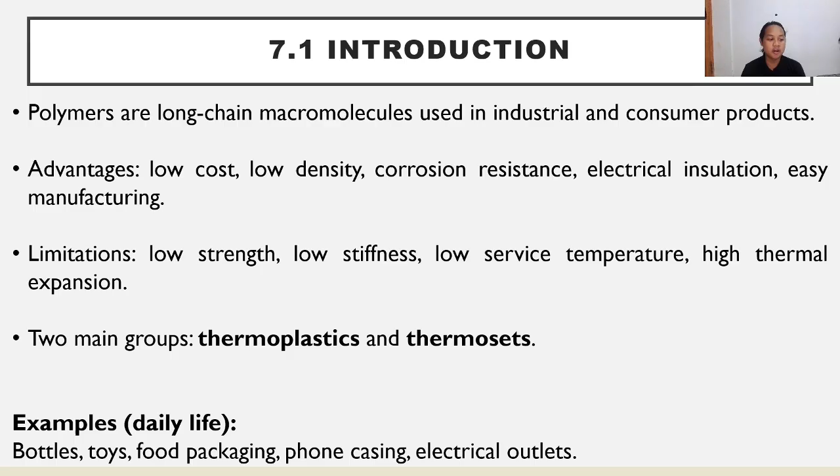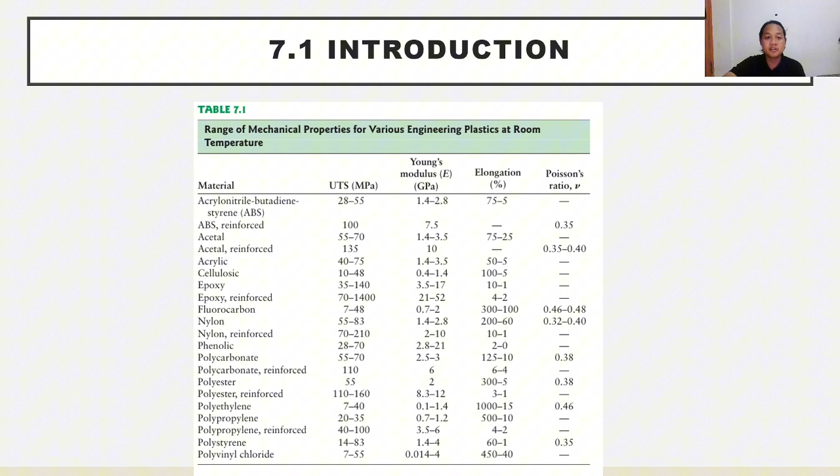These are the range of mechanical properties for various engineering plastics at room temperature, as you can see in table 7.1.

Next, the structure of polymers. The properties of polymers depend largely on the structure of individual polymer molecules, molecule shape and size, and the arrangement of molecules to form a polymer structure.

Polymer molecules are characterized by their very large size, a feature that distinguishes them from most other organic chemical compositions.

First, we have the polymer basics. These polymers consist of repeating units called MERS, made through polymerization, like linking monomers into long chains.

Next, we have the polymerization types. There is condensation polymerization, which produces polymers plus byproducts. And we have addition polymerization, with no byproduct, where MERs add into the chain.

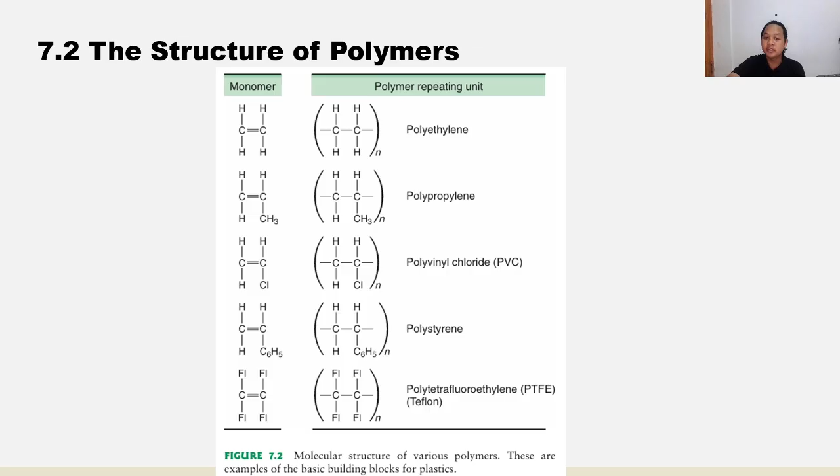Next is polymerization. Polymerization processes are complex. They will be described only briefly here, although there are several variations.

Two polymerization processes are important, like condensation and addition polymerization. The polymerization monomers can be linked into the polymers in repeating units to make longer and larger molecules by a chemical process called a polymerization reaction.

In condensation polymerization, as you can see in figure 7.3 in the next slide, polymers are produced by the formation of bonds between two types of reacting mers. A characteristic of this reaction is that reaction byproducts are condensed out.

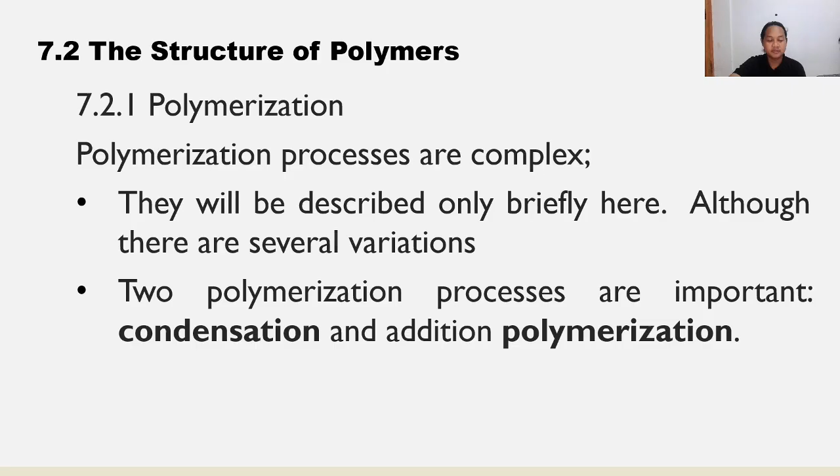As you can see in figure 7.3, we have the example of polymerization. In point A, we have condensation polymerization of nylon 6,6, and point B, we have the addition polymerization of polyethylene molecules from ethylene mers.

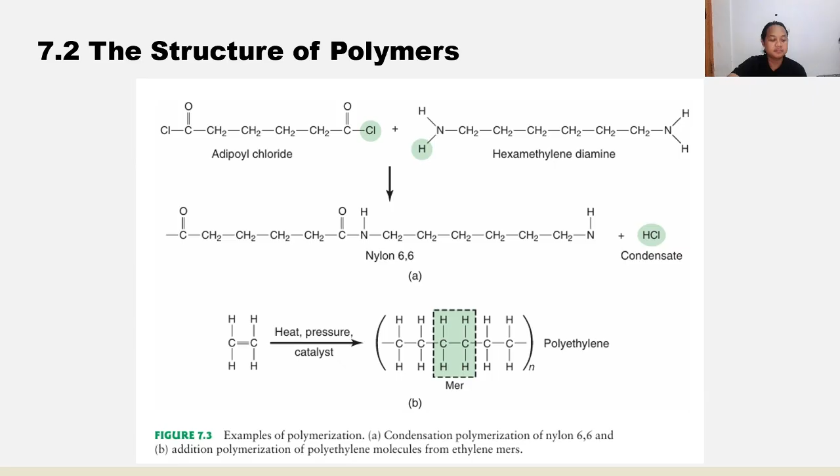In point A, we have the linear structure. Thermoplastics such as acrylics, nylons, polyethylene and polyvinyl chloride have linear structure. The chain-like polymers shown in figure 7.2 are called linear polymers because of their sequential structure.

In point B, we have the branch structure, such as in polyethylene. The properties of a branch polymer depend not only on the type of monomers, but also on their arrangement in the molecular structure.

In point C, we have cross-link structure. Many rubbers or elastomers have this structure, and the vulcanization of rubber produces this structure. Cross-link polymers are generally three-dimensional in structure, with adjacent chains linked by covalent bonds.

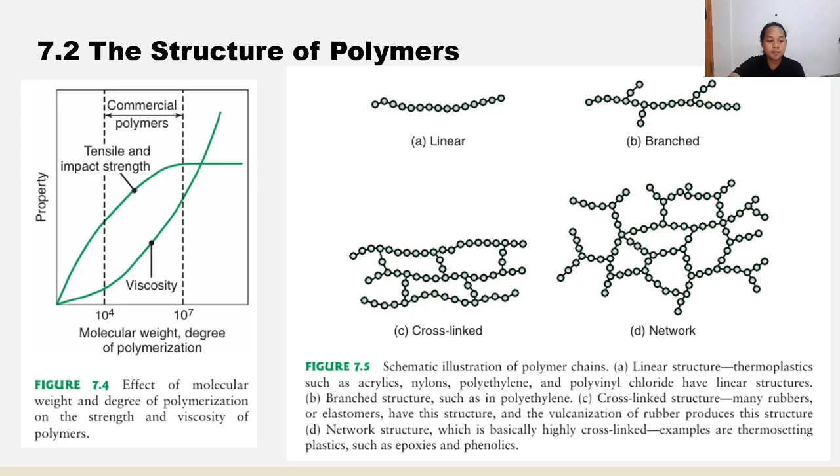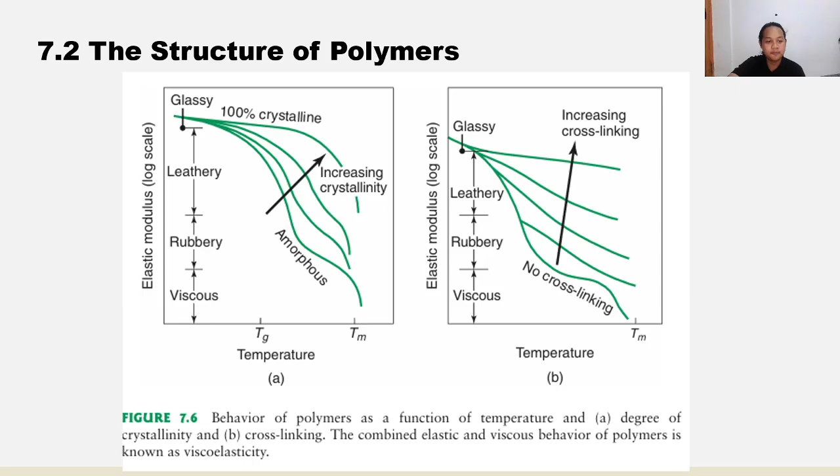These are the figures like the elastic modulus and temperature for the polymers. In figure 7.6, there is the behavior of polymers as a function of temperature and degree of crystallinity and cross-linking. The combined elastic and viscous behavior of polymers is known as viscoelasticity.

Next, you have crystallinity. The crystalline regions in polymers are called crystallites. These crystals are formed when the long molecules arrange themselves in an orderly manner, similar to the folding of a fire hose in a cabinet or of facial tissues in a box.

The crystalline regions increase strength, hardness, and melting point. Next are amorphous regions, which are more flexible and transparent. Although amorphous polymers do not have a specific melting point, they undergo a distinct change in their mechanical behavior across a narrow range of temperatures.

Next is glass transition temperature, or TG. The polymer becomes soft or rubbery above TG.

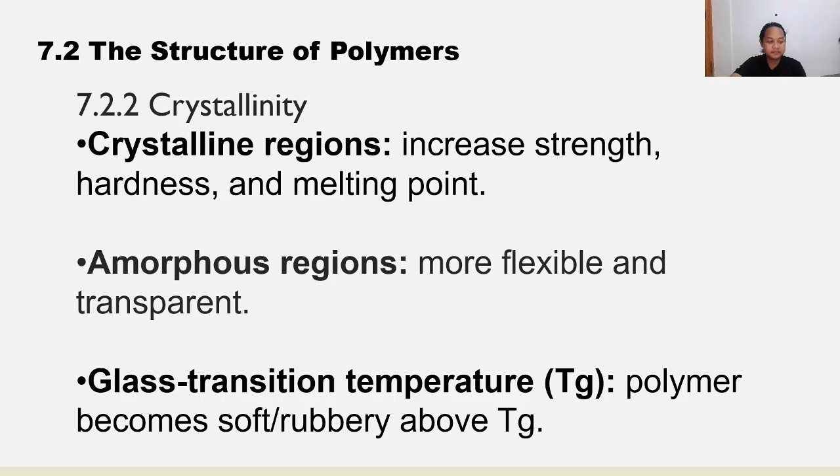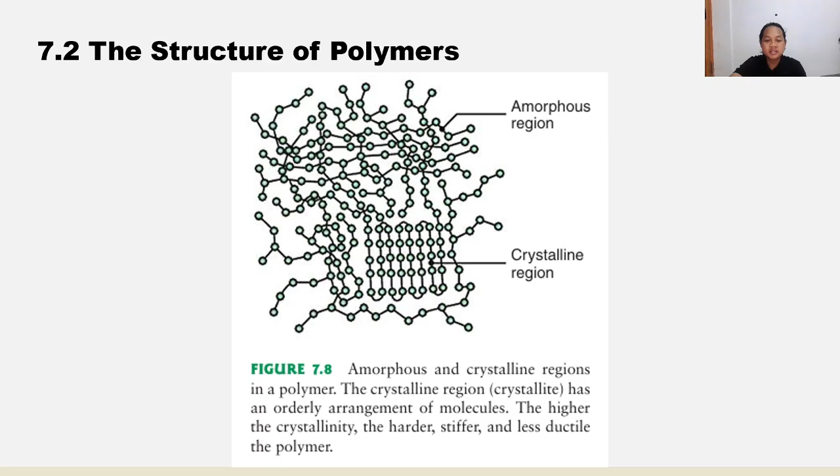These are the pictures of amorphous and crystalline regions in a polymer. The crystalline region, or crystallite, has an orderly arrangement of molecules. The higher the crystallinity, the harder, stiffer, and less ductile the polymer.

Next, we have the glass transition temperature. Although amorphous polymers do not have a specific melting point, they undergo a distinct change in their mechanical behavior. At low temperatures they are hard, rigid, brittle, and glassy, but at high temperatures they are rubbery or leathery.

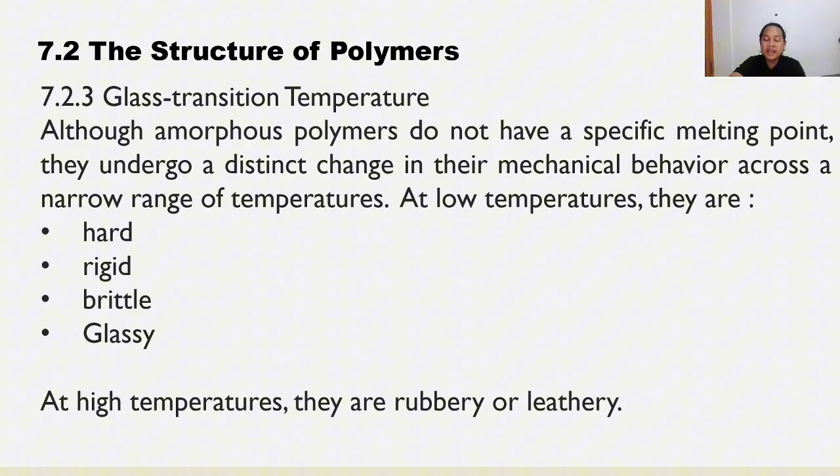These are the figures of specific volume of polymers as a function of temperature. Amorphous polymers such as acrylic and polycarbonate have a glass transition temperature, TG, but do not have a specific melting point, TM. Partly crystalline polymers such as polyethylene and nylon contract sharply while passing through their melting temperatures during cooling.

As you can see in Table 7.2, there are the glass transition and melting temperatures of some polymers like nylon 6,6, polycarbonate, polyester, polyethylene, and others.

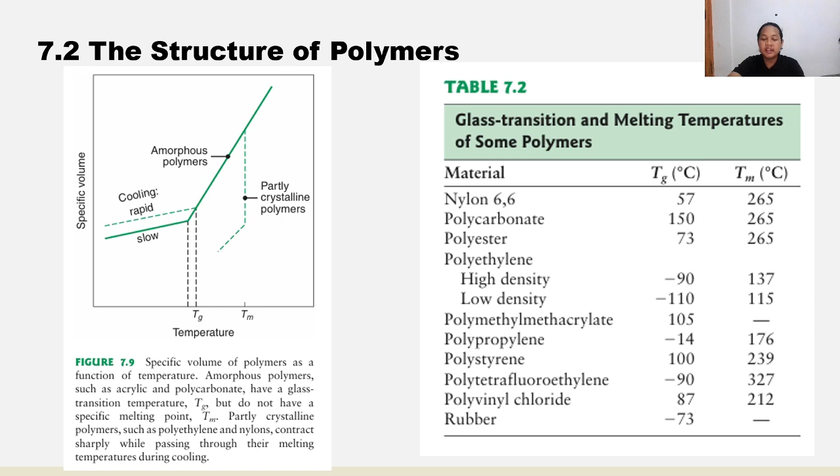Next, you have polymer blends. The advance in blending involves several components, creating polyblends that utilize the favorable properties of different polymers.

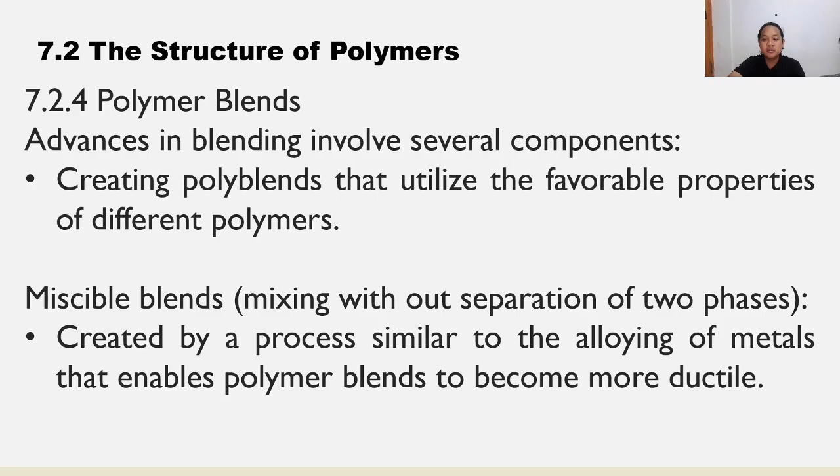Next, we have miscible blends, mixing without separation of two phases, created by a process similar to the alloying of metals, which enables polymer blends to become more ductile.

Next is thermoplastic. It was noted earlier that within each molecule, the bonds between adjacent long-chain molecules are much weaker than the covalent bonds between mers. It is the strength of the secondary bonds that determines the overall strength of the polymer.

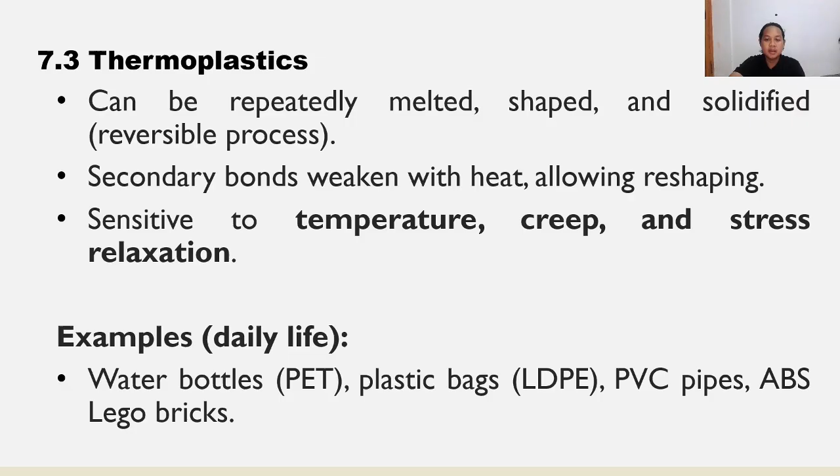Linear and branched polymers have weak secondary bonds. Thermoplastics can be repeatedly melted, shaped, and solidified, meaning the process is reversible. Secondary bonds weaken with heat, allowing reshaping, and making the material sensitive to temperature, creep, and stress relaxation. Examples are water bottles, plastic bags, PVC pipes, and ABS Lego bricks.

In Figure 7.10, we have the general terminology describing the behavior of three types of plastics. PTFE has Teflon as its trade name, and Figure 7.11 shows the effect of temperature on the stress-strain curve for cellulose acetate, a thermoplastic. Note the large drop in strength and the large increase in ductility with a relatively small increase in temperature.

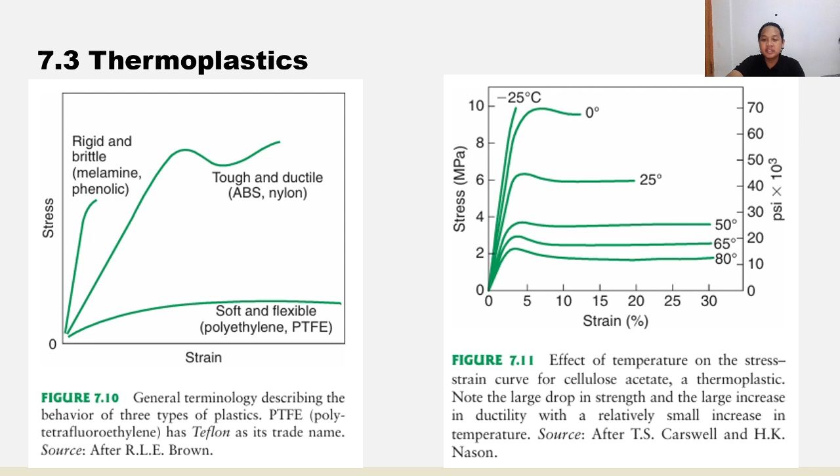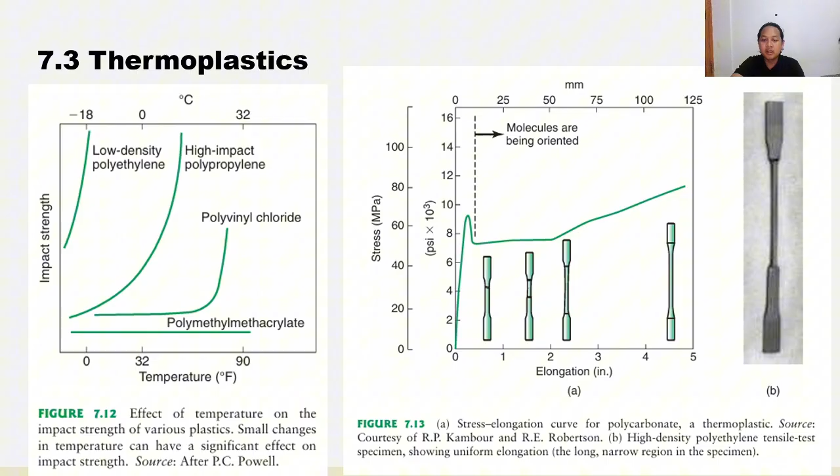In Figure 7.13, point A shows the stress-elongation curve for polycarbonate, a thermoplastic. Point B shows the high density polyethylene tensile test specimen, showing uniform elongation, the long and narrow region in the specimen.

Next, we have thermosetting plastics. When the long chain molecules in a polymer are cross-linked in a three-dimensional arrangement, the structure in effect becomes one giant molecule with strong covalent bonds.

These polymers are called thermosetting polymers, or thermosets, because the network is completed and the shape of the part is permanently set. This curing reaction, unlike that of thermoplastics, is irreversible.

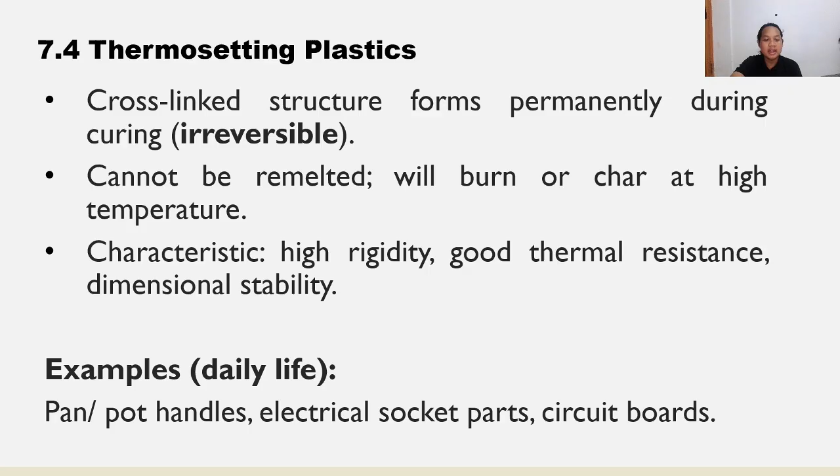As I said before, thermosetting plastics have a cross-linked structure that forms permanently during curing, meaning it's irreversible. They cannot be remelted, and will burn or char at high temperature. Characteristics include high rigidity, good thermal resistance, and dimensional stability. Examples in daily life of thermosetting plastics are pan or pot handles, electrical socket parts, and circuit boards.

Next is additives in plastics. In order to impart certain specific properties, polymers usually are compounded with additives.

These additives modify and improve certain characteristics of the polymer, such as stiffness, strength, color, weatherability, flammability, arc resistance for electrical applications, and ease of subsequent processing. The additives modify properties and performance of plastics.

There are common types: fillers to increase strength and reduce cost, plasticizers to improve flexibility, stabilizers to prevent degradation, colorants to add color, flame retardants to improve fire resistance, and lubricants to improve moldability.

Examples in daily life of additives in plastics are plasticizer in flexible PVC cables, and fillers in dashboard or panel components.

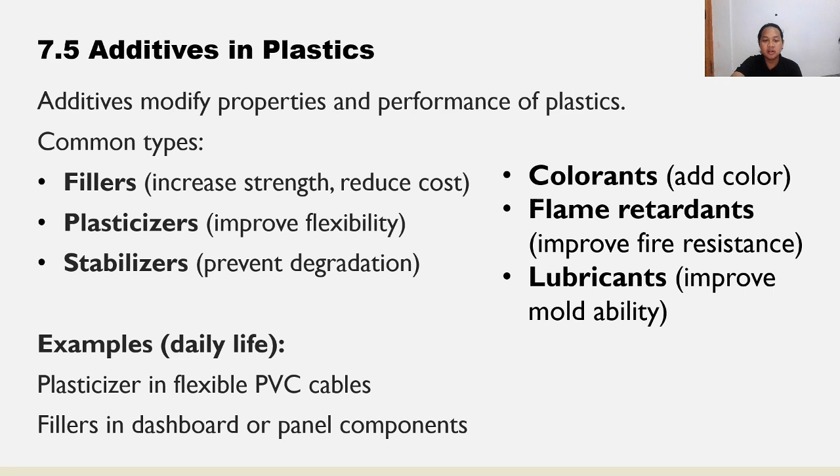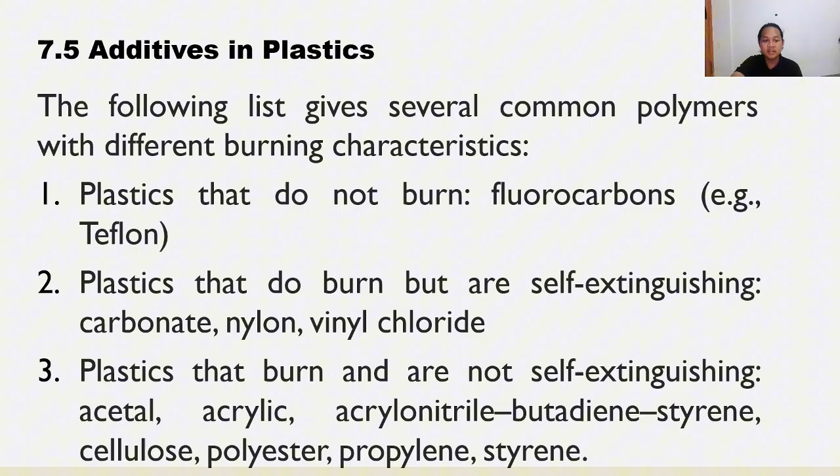The following list gives several common polymers with different burning characteristics. First, plastics that do not burn, or fluorocarbons. Second, plastics that do burn but are self-extinguishing, like carbonate, nylon, and vinyl chloride. Third, plastics that burn and are not self-extinguishing, like acetal, acrylic, acrylonitrile butadiene styrene, cellulose, polyester, propylene, and styrene.

Next, we have the general properties and applications of thermoplastics. The general characteristics and typical applications of major thermoplastics, particularly as they relate to the manufacturing and service life of plastic products and components, are outlined in this section.

General recommendations for various plastic applications are given in Table 7.3 and Table 7.4, which list some of the more common trade names of thermoplastics.

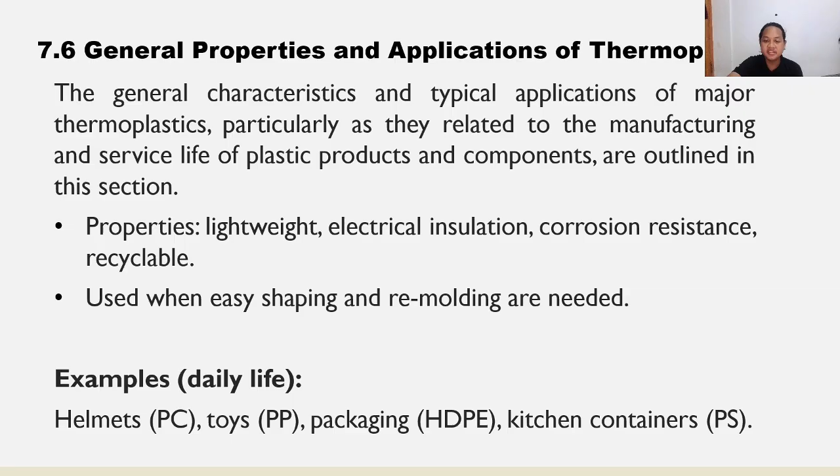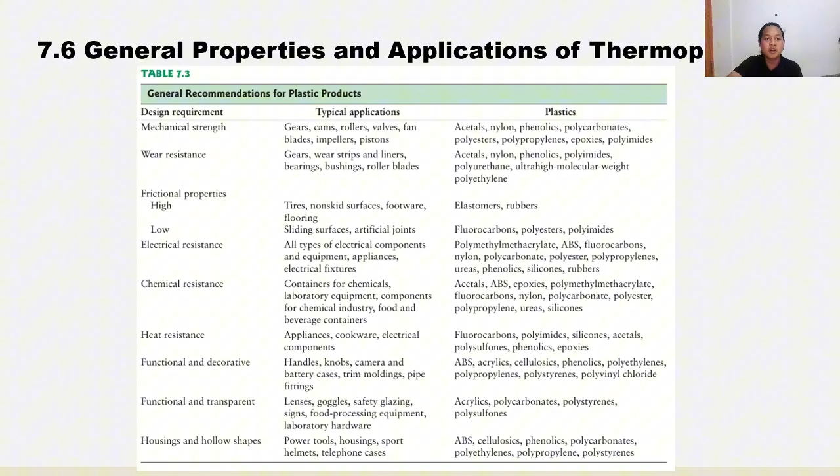These are the tables that have the general recommendations for plastic products, like the design requirement for mechanical strength, typical applications, and the plastics used.

In Table 7.4, there are trade names for thermoplastic polymers.

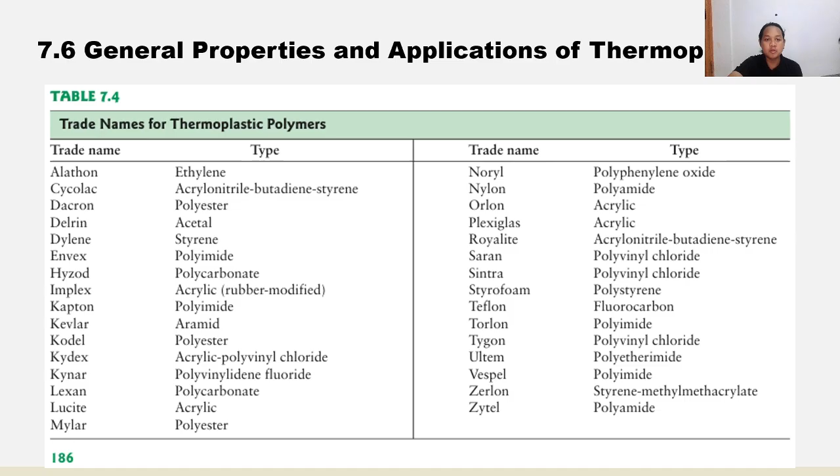Next, you have acetals, from acetic acid and alcohol, which have good strength, good stiffness, and good resistance to creep, abrasion, moisture, heat, and chemicals. Acrylics possess moderate strength, good optical properties, and weather resistance.

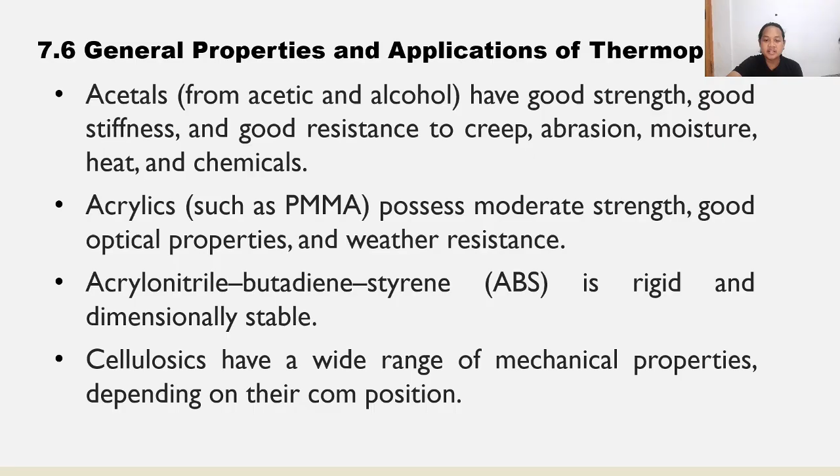Next is acrylonitrile butadiene styrene, which is rigid and dimensionally stable. Next is cellulosics, which have a wide range of mechanical properties depending on their composition.

Fluorocarbons possess good resistance to high temperature, chemicals, weather, and electricity. For example, a melting point of 327 degrees Celsius or 621 degrees Fahrenheit for Teflon. Polyamides, from the words poly, amine, and carboxyl acid, are available in two main types: nylons and aramids.

Nylons, a coined word, have good mechanical properties and abrasion resistance. Aramids, or aromatic polyamides, have very high tensile strength and stiffness.

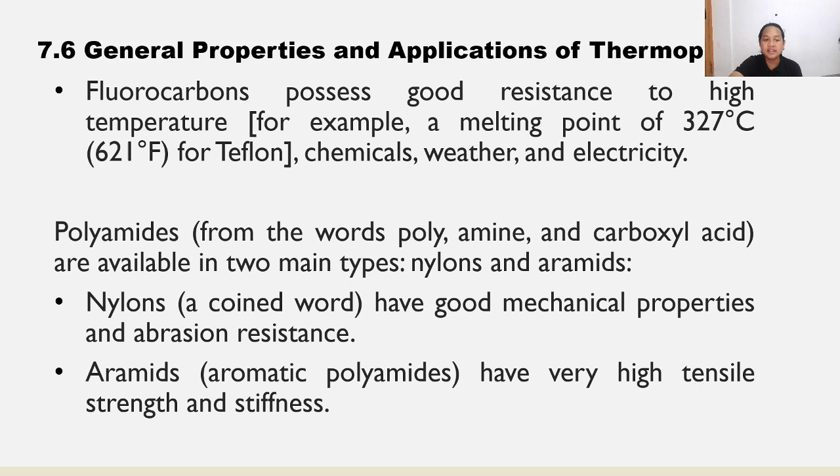Polycarbonates are versatile. Polyesters have good mechanical, electrical, and chemical properties, good abrasion resistance, and low friction. Polyethylenes possess good electrical and chemical properties, and their mechanical properties depend on composition and structure.

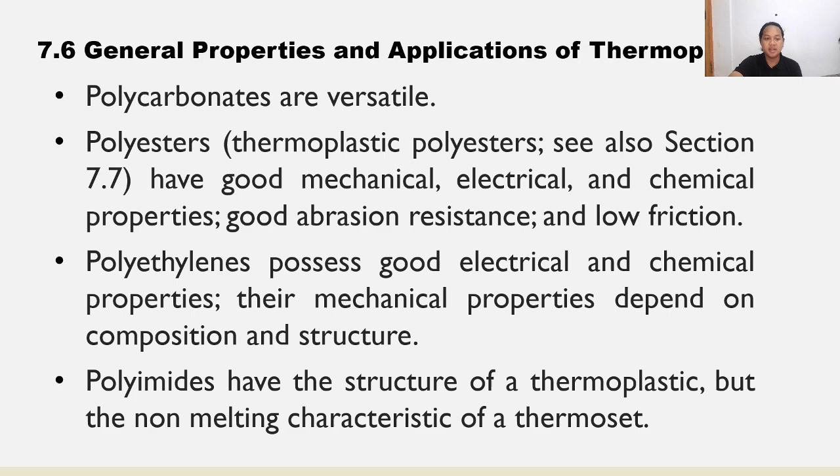Polyimides have the structure of a thermoplastic, but the non-melting characteristic of a thermoset. Next, polypropylenes have good mechanical, electrical, and chemical properties and good resistance to tearing.

Polystyrenes generally have average properties and are somewhat brittle but inexpensive. Polysulfones have excellent resistance to heat, water, and steam. They have dielectric properties that remain virtually unaffected by humidity, are highly resistant to some chemicals, but are attacked by organic solvents.

Polyvinyl chloride, or PVC, has a wide range of properties, is inexpensive and water resistant, and can be made rigid or flexible.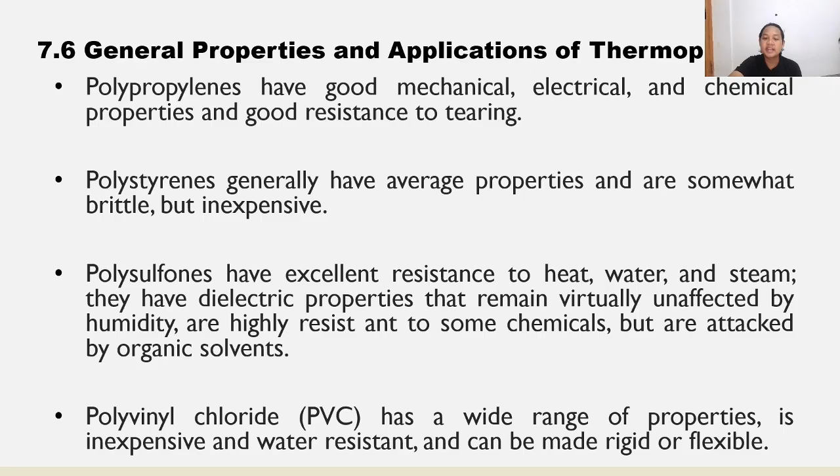Next is general properties and applications of thermosetting plastics. This section outlines the general characteristics and typical applications of the major thermosetting plastics.

First is alkyds, from alkyl meaning alcohol and acid. They possess good electrical insulating properties, impact resistance and dimensional stability, and low water absorption.

Aminos have properties that depend on composition. Generally, they are hard, rigid, and resistant to abrasion, creep, and electrical arcing. Epoxies have excellent mechanical and electrical properties, good dimensional stability, strong adhesive properties, and good resistance to heat and chemicals.

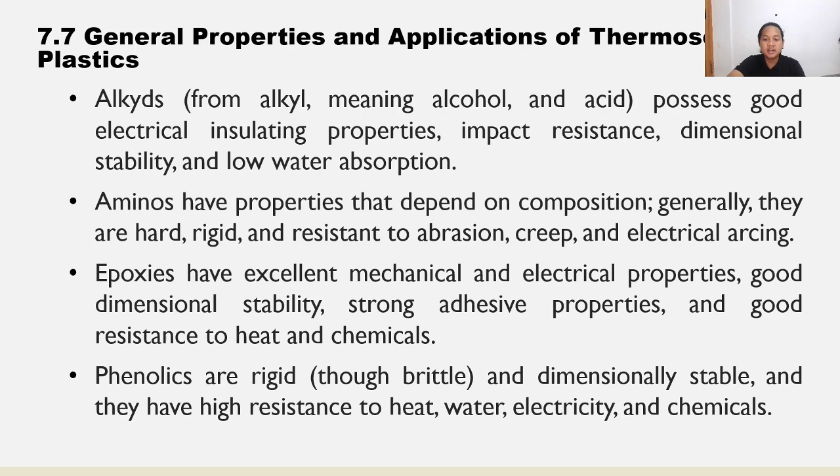Phenolics are rigid, though brittle, and dimensionally stable, and they have high resistance to heat, water, electricity, and chemicals. Polyesters have good mechanical, chemical, and electrical properties.

Polyimides possess good mechanical, physical, and electrical properties at elevated temperatures. They also have good creep resistance, low friction, and low wear characteristics.

Silicones have properties that depend on composition. Generally, they weather well, possess excellent electrical properties over a wide range of humidity and temperature, and resist chemicals and heat.

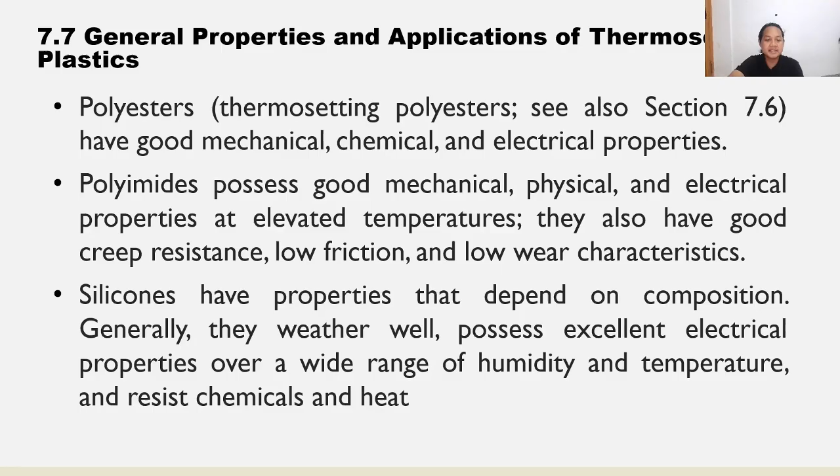Next is biodegradable plastics. Plastic waste contributes about 10% of municipal solid waste by weight. On a volume basis, they contribute between 2 and 3 times their weight. Only about one third of plastics production goes into disposable products such as bottles, packaging, and garbage bags.

Biodegradable plastics are designed to decompose naturally by microorganisms, often made from starch, cellulose, or mixed agro waste, and the challenge is higher cost and limited long-term durability.

Examples in daily life include compostable shopping bags and biodegradable food packaging. They carry recycling symbols in the shape of a triangle outlined by 3 clockwise arrows and having a number in the middle. This number corresponds to the following plastics.

PETE is for polyethylene terephthalate, HDPE for high density polyethylene, V for vinyl, LDPE is low density polyethylene, PP is polypropylene, PS is polystyrene, and the others.

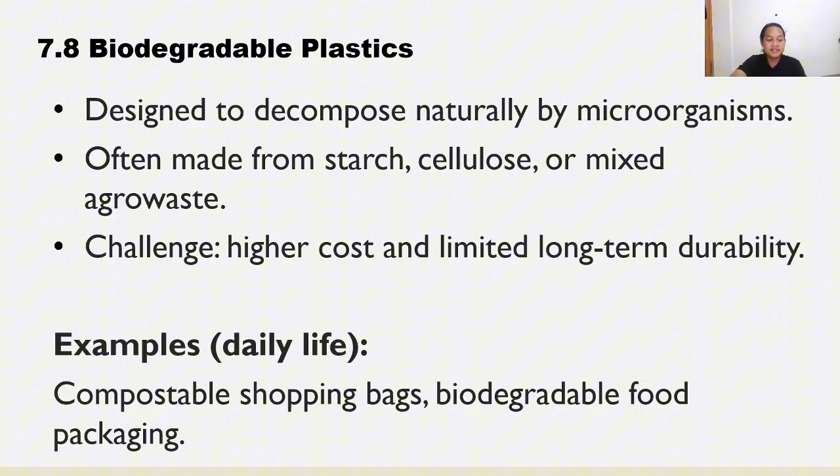Next, we have the elastomers or rubbers. Elastomers consist of a large family of amorphous polymers having a low glass transition temperature. They have a characteristic ability to undergo large elastic deformation without rupture. Also, they are soft and have a low elastic modulus.

The term elastomer is derived from the words elastic and mer. Amorphous polymers with very low glass transition temperature and large elastic deformation can stretch and recover shape, are often cross-linked, and applications require flexibility, sealing, or vibration damping. Examples are tires, shoe soles, rubber bands, seals, hose, and shock absorbers.

The term elastomer is derived from the words elastic and mer. First, we have natural rubber. The base for natural rubber is latex, a milk-like sap obtained from the inner bark of a tropical tree.

Synthetic rubbers, examples being butyl, styrene butadiene, and polybutadiene. After that, silicones: silicones have the highest useful temperature range of elastomers, but other properties such as strength and resistance to wear and oil generally are inferior to those in other elastomers.

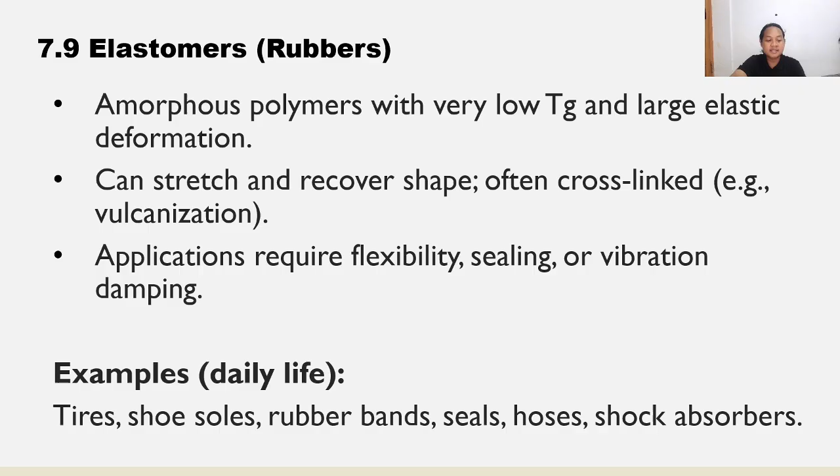Next is polyurethane. This elastomer has very good overall properties of high strength, stiffness, and hardness, and it has exceptional resistance to abrasion, cutting, and tearing.

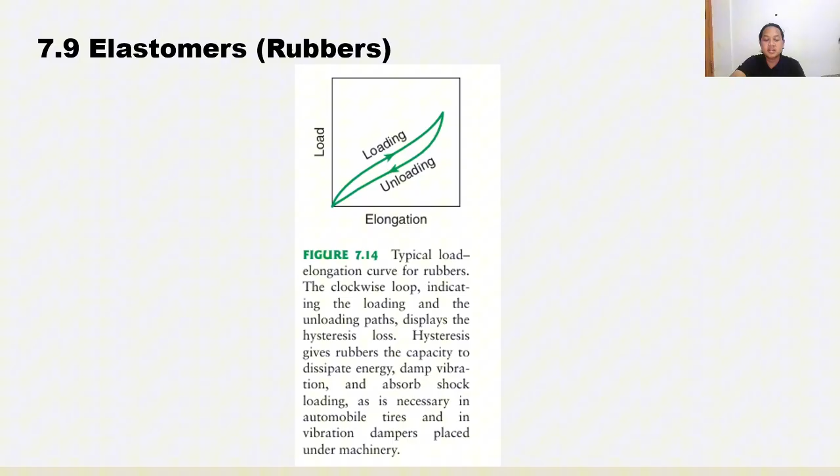These are the figures of a typical load elongation curve for rubbers. The clockwise loop indicating the loading and unloading paths displays the hysteresis loss. Hysteresis gives rubbers the capacity to dissipate energy, damp vibration, and absorb shock loadings, as is necessary in automobile tires and in vibration dampers placed under machinery.